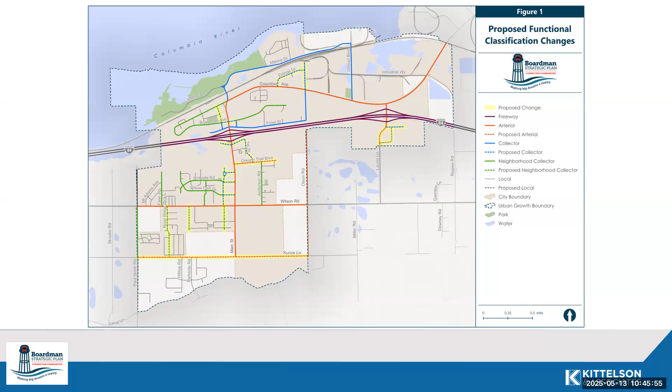Unstable. So you've kind of gone in and out. Sorry, what was that, Carla? Lost you and got you back. So I'm curious if the folks online. Yeah, actually, Matt's been steady on my end, Carla. Definitely our end. Okay. Yeah. Well, I'm not sure what you heard and didn't hear.

And so at the risk of repeating everything, I was just ending with: are there any comments on the proposed modifications for the arterials on the map here? System and kind of what the difference is between an arterial, a collector, and then a local road. I know there's some experts in the room because of where you work and what you do, but there's a couple of folks in here that this might be new to. So we're working on getting all the speeds designated, like balancing out the speeds and different types of uses that are going to be on each of those?

So classification is not specifically attached to uses. It's really about its function within the system. Okay. So if you think about the street you live on, let's say you live on Mount Hood or Mount Adams or Boardman Avenue. You live on a local street, and that local street will funnel into what's called a collector. And that's a street that's maybe internal to that neighborhood, but is a more defined, get you from north to south or east to west road.

And so if you live in River Ridge and you live on Eagle, you live on a local street. But when you get to River Ridge, you're now on what we're going to call in the future, I believe, a collector. And then as you get to Kunze or you get to Wilson, you get on an arterial. So it's a hierarchy that you get to.

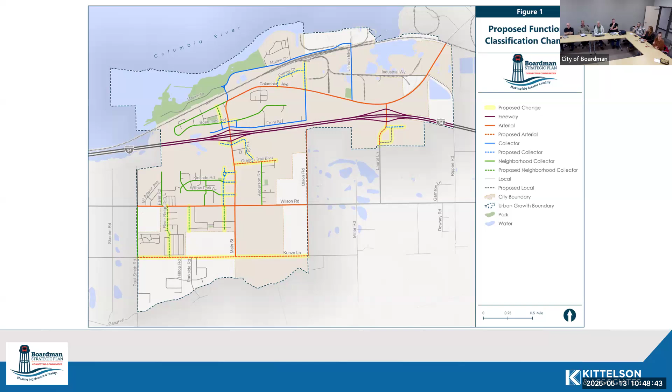I guess maybe what I'll say is regarding this map, is there anything that maybe people disagree with, without going through every single change here? But we do have upgrades to certain roads. Those are all highlighted in yellow. Anything with a dashed line would be a proposed modification to that classification. And what might be a little confusing is we don't have the future extensions of roads on this map, because that will come in a later version of this map. I just wanted to highlight what we are potentially proposing to change for what is already built today, not what would be built in the future. And that'll come here in a few slides.

So maybe just one final time, any potential conflicts or changes or disagreements with any of the changes we're proposing here? Okay, hearing none, let me just move on. Doesn't mean we couldn't come back to these, but for the sake of keeping us moving, I'll move on. The next slide here is what we're calling proposed federal functional classification changes.

So you might be asking yourself, why do we have a federal functional classification? Why do we have a local classification? Well, the local classification from the previous slide is what Boardman identifies for the roads in its city. Now, it doesn't necessarily mean it owns all of those roads, such as I-84, for example, that's owned and maintained by ODOT, but the city still classifies it as a freeway. And so that's the local functional classification, the previous slide.

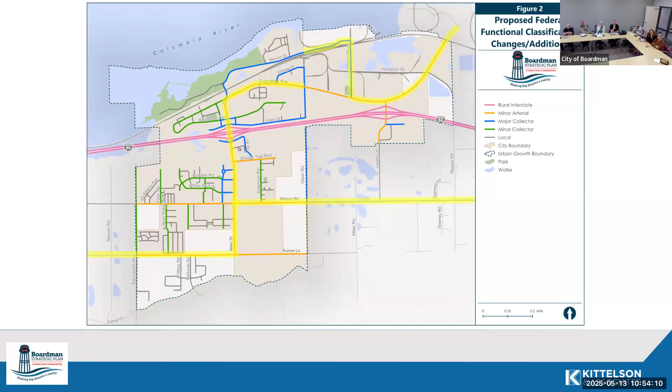So the step on this one, we'll include it in the TSP, but the long-term step is the city will work with ODOT's Region 5 planner and they'll start a process to get these roadways designated on the federal functional classification system. So on the non-state highway system.

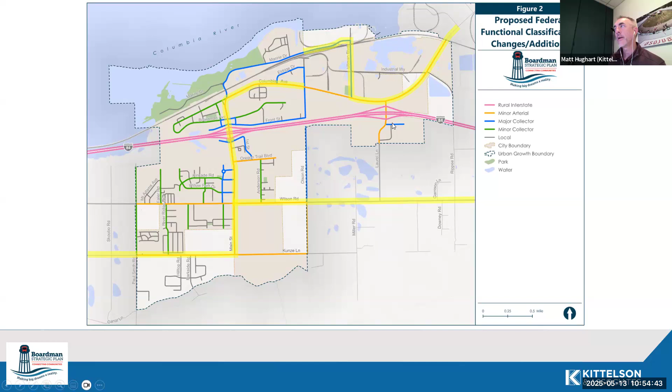Okay, moving on. Sticking with the context or the theme of classifications, one of the things the city does not have at the moment, it's kind of informally noted, is how do we deal with freight? So there's kind of two kinds of freight. There's industrial, long haul, regionally freight oriented trips where they're generated to and from industrial uses or manufacturing uses or commercial uses that have a lot of deliveries.

And then you've got sort of what we call local freight. And local freight could be as simple as your Amazon deliveries and other non-consistent, generally smaller freight that's serving commercial and or local uses. So we came up with this map to help the city designate what we're calling the regional freight routes and the local freight routes.

And I think this is sort of a nod to the Port of Morrow and its prominence in the city, part of the city anyways, to make sure that from a freight designation standpoint, we're clear on where we want freight to orient itself, certain types of freight related trips, and where we don't want freight to be using. So I guess the point here is, while the Main Street interchange is a viable route to some of these industrial uses in the Port of Morrow, I think the city would be looking to expect most of those freight oriented trips to continue to use the Laurel Lane interchange.

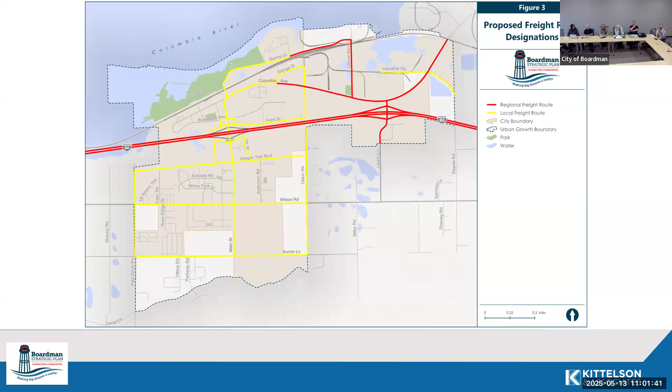Sure, and I can share those maps. Those have been maps for quite some time. Well, I think we had something previously that we incorporated those maps in. Yeah. I can forward those to you guys. There's separate routes, right? We've got a heavy route going west, a heavy route going east, and then also a long route going west and a long route going east. So there's dimensional issues as well as weight issues. Okay. Well, Jacob, why don't you resend us what you believe to be the most recent versions of that, just so that we can confirm we do have all of that information. What we could potentially do is mark up a version of this map, or as Carla suggested, maybe there's a 3B version of it that deals with those special scenarios, and make sure that's captured correctly. And then we'll share it back with you for confirmation that it's graphicked appropriately.

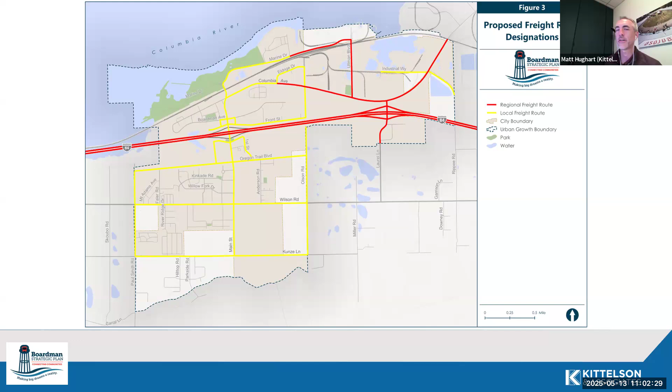Okay. Anything else? I fully expected that comment to come up, so I was prepared for that one, but anything else? Okay. Well, we're going to come back to this issue in a little bit as we get into the solutions projects.

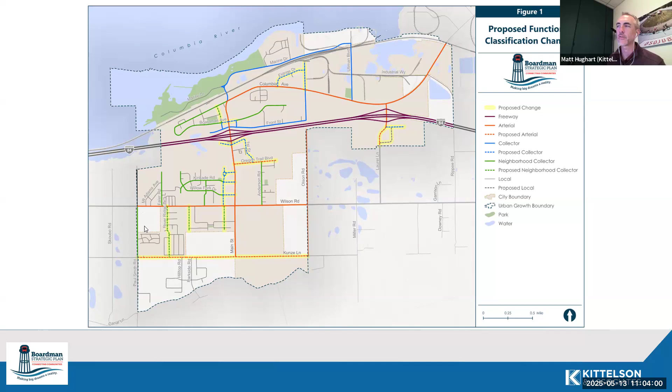Now, Paul Smith is an existing road, but it's not an upgraded road. So we've got a project as R9 to upgrade Paul Smith Road, right? Yep. To more of an urban standard according to the functional classification map that we had shared back over here, which would be showing it as a local road and or an upgraded neighborhood collector. So a lot of what you're seeing on here are upgrades to existing roads or identification of projects that would build new roads.

We're not seeing your aerial, Matt. Oh, sorry. We're not seeing your aerial. I don't know why. Oh, it's because I'm not sharing that particular screen. Anyway, I think we can visualize that one.

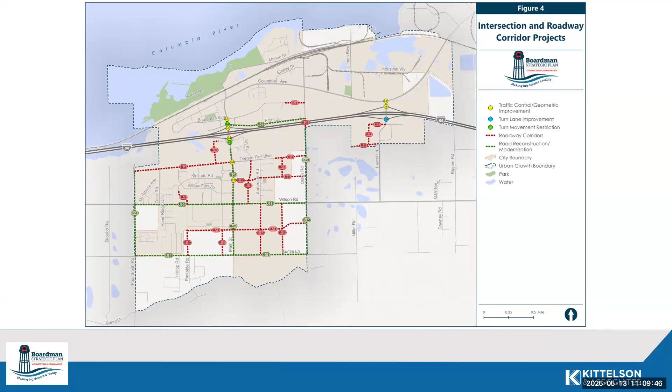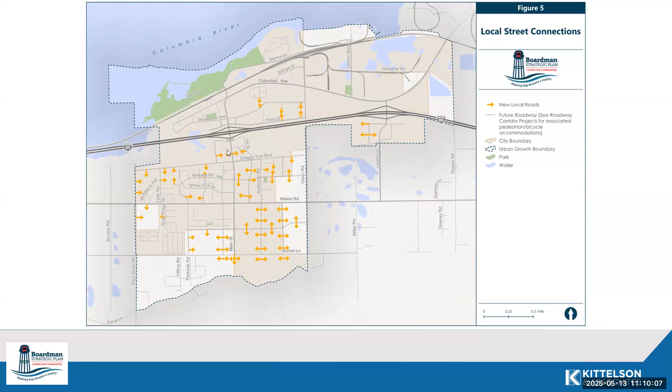Marlo, which figure are you referring to that you see it on a separate figure, but not on the one shown on the screen here? I see it on figure 5. Figure 5. Let me show that one real quick. Sorry, I'm going to zip past. Okay, so are you referring to what's going on right in here? Yes, because from an ODOT perspective, I was curious about that new road, and I didn't see a lot about it. Yeah, great comment. I don't know which graphic to focus on here. If I show some of my other ones, I'm gonna get us too far astray. But let me just show what this figure 5 is.

So figure 5 builds upon the collector and higher level roads that were shown. Back here, all these red and green lines, they're primarily focusing on your collectors and higher. They're not focusing on local streets. TSPs typically don't outline the specificity or the alignments or even the rough alignments of local streets. What they typically do, however, is show what we call assumed future connections. So figure 5, Marlo, is showing in orange where we would want to see local street connections occurring. So you pointed out what's going on here.

The interchange area management plan for the Main Street IAMP that was adopted back in 2009 envisions this backage road we're calling Southwest First Street. Southeast First Street was recently reconstructed, so now it connects Oregon Trail up to Front. This backage road will connect over here, but the IAMP does show a number of local streets backfilling and serving the redevelopment on both the east and west side. So these orange lines in here don't necessarily represent collectors. They just represent future local streets that could be developed to help support those uses.

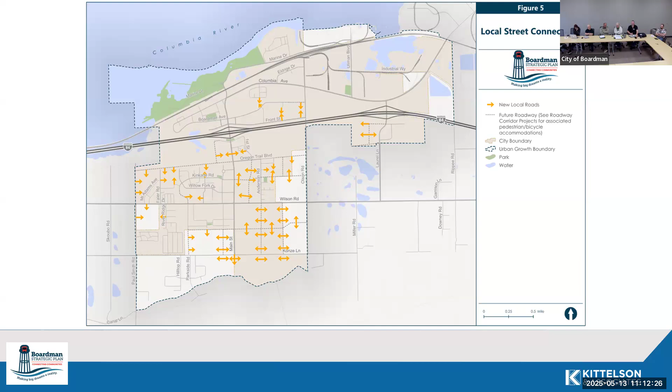Now, if you go deeper into the IAMP, those local streets are envisioned most likely to be limited access connections to Main Street. And so they're not likely to be full access right off of Main Street. So that's what these orange lines are representing. In particular, the ones just to the south of the interchange are a representation of what was in the IAMP adopted back in 2009. So, question, R6, is that what is currently Quail Lane going across there?

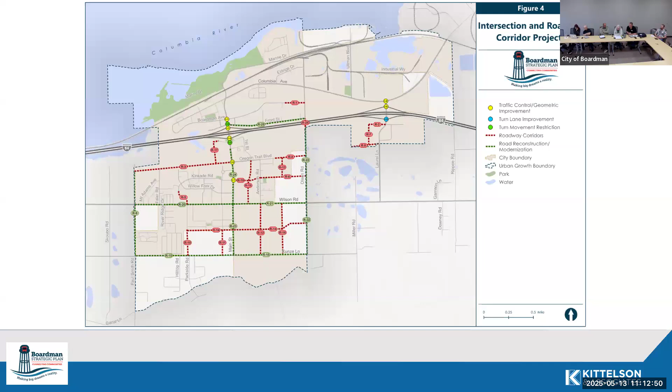R6? Give me a sense where R6 is here. Anderson Road to Wilson. Yeah. So R6 is really unknown. So R19 connects to R6. I don't know that in the end R19 and R6 will actually connect. That's a really big question. There is a vacant lot in that manufactured home project that we could potentially acquire for a street connection. We've been going back and forth internally as to whether or not we should. Again, I don't want you to think that R6 is on a map and that's where R6 will go.

But we are thinking about how do we take the Bailey Park subdivision that is in phase 1. They're going to come in with phase 2, 3, and 4, we think over the next little bit. How do we connect Bailey Park? It connects already to Anderson. Is there a way to connect Bailey Park to Wilson? I don't know. There's some vacant properties in there, and then you get into the UGB area. So the city is the beige and the white is the UGB. Again, as with both R4 and R6, when you get into the UGB, R4 has a pretty clear path.

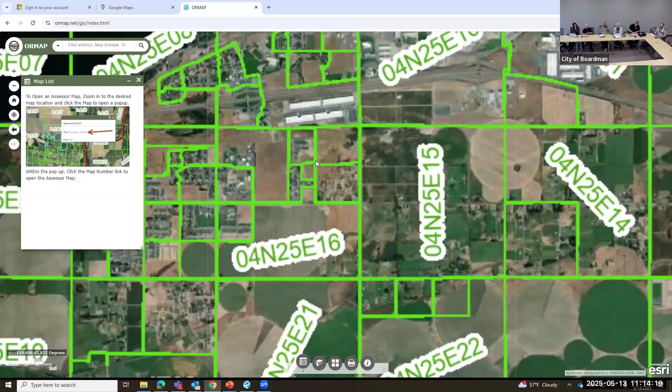R6 has a less clear path, but there is some property in there that is oddly shaped and appears to have a flag, or a pole to the flag, that a road could connect on. That's generally where it is. That's not specifically where it is. And so I just pulled up a map.

And just for my clarity, these designations 1, 2, 3 are just designators, not a timeline. Nope. It's a random number. I don't think it's a timeline. R23, R24, and R25 are programmed. I didn't see them. Yeah, the numbers, Marlo, the numbers on the map don't mean anything. It's just the order in which we had created them. We can reshuffle the numbering if you want. So don't worry about the numbering. It doesn't have any bearing on temporal issues, nothing to do.

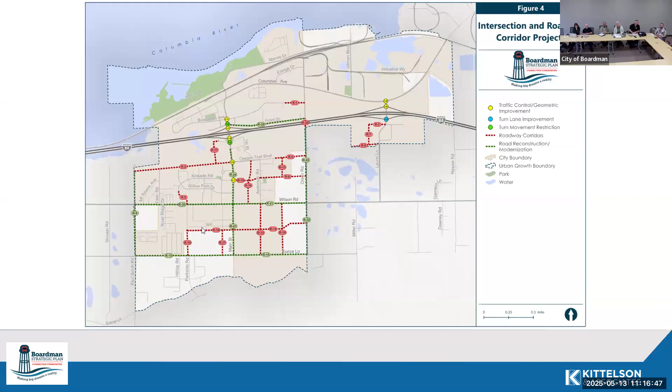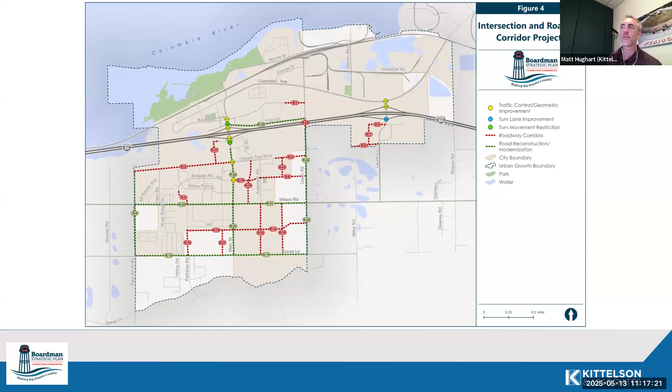Okay, so any questions or challenges on any of these alignments, please share those back to us. We don't pretend to nail this the first time. And there might be some tweaks to these roadways, but again, they're just lines on the map. However, we want to spend the rest of the presentation talking about our best and most challenging area, which is Main Street, and particularly the Main Street I-84 interchange area. You'll see on this map there's a lot of intersections popping up. And to be quite honest, there's some challenges that we are struggling with a little bit. And I think the city is going to have to face some harsh realities.

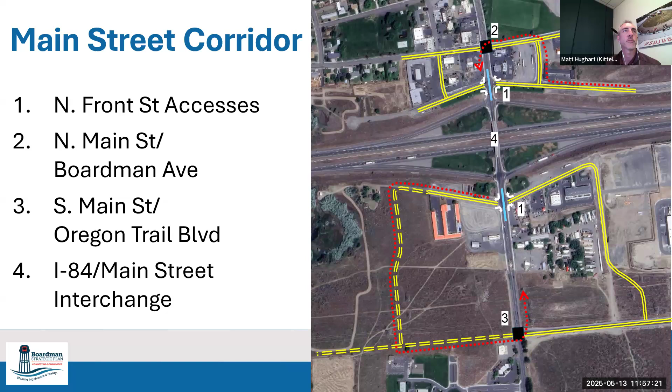It's also got another pretty significant limitation in that its vertical clearance on I-84 is not to desirable standards or dimensions. Any high load coming east-west on I-84 has to actually exit the freeway on these ramps, cross over the intersection and then back down in order to get east-west through here. So it is a limited overpass for those two really important reasons.

One of the things that we've found is when you look at the capacity of these freeway ramp terminals themselves, and ignore the details on this image, I know you're going to want to look at it, we're projecting a lot of traffic growth through this interchange for reasons previously stated. There are single-lane ramps at the interchange terminals. There are no north and southbound left turn lanes.

And as you probably already know and have experienced during certain times of the day, you wait quite a bit coming off the freeway to make an east or westbound left turn to go south, particularly during peak school times, and you've got some traffic backup and queuing occurring on these ramps.

So one of the big findings is if we can't find an alternative to mitigate the Main Street demand, and we don't think we've got one, even with Olson as an option, there's still going to be a lot of north-south traffic on Main Street. That's going to limit the capacity of these ramp terminals.

And one of the things we found is that roundabouts at these ramp terminals don't have enough capacity. There's only so much capacity you can squeeze into a roundabout, and with the demand that we're projecting in the long term, a roundabout just isn't going to cut it.

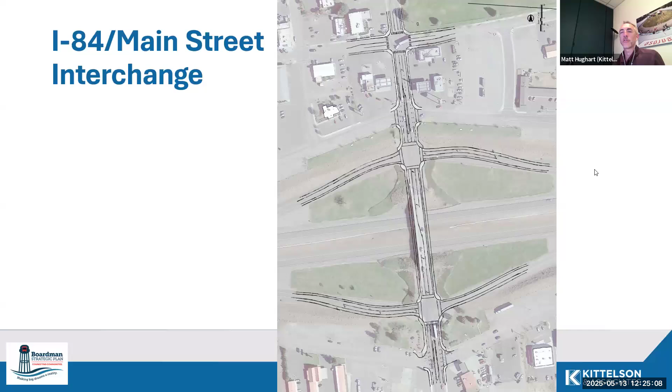Let me move on. There's a couple of other figures in here we're not going to have time to really dive into, but we've got a pedestrian projects figure. So all of these projects represent improvements that the city should consider on its existing network, as well as projects that would help to tie the city together more from a pedestrian standpoint. So there's any number of projects on here. Some of these are roadway upgrades. Some of these are new facilities and new crossings. Sorry, Carla, were you trying to say something?

Yeah, I was just gonna say, Matt, that this gets augmented, I think, by what's happening with our Parks Master Plan as well, because it's also really talking about connectivity, whether it be trails or sidewalks. So yeah, this figure kind of gets married with what we're dealing with in the Parks Master Plan also.

Exactly. And I will point out a nuance on here: even though we've got roadways like Oregon Trail Boulevard being extended, we didn't include a pedestrian project on that simply because we know when that gets built, it's not going to get built without pedestrian accommodation. So anything that you see on this map is an upgrade to an existing corridor where a sidewalk doesn't exist today. That's an important distinction: why aren't we showing projects on some of these new roads? Because they're going to get built with those, and that's what your standards say. So we didn't separate those projects out.

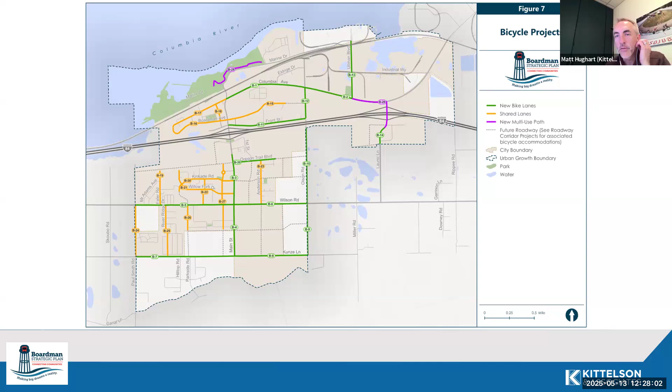I didn't see the project for Marine Drive and Main. I'm sorry, repeat the location again. Main Street and Marine Drive. Oh, Main Street and Marine. Are we talking about up here? Yeah, at the Y. So there was a ped project that would add a sidewalk to the bridge going over the railroad and kind of connecting it down. And I think what we're recognizing is that the intersection and the geometry is so kind of funky and odd that maybe it would be better to route pedestrians around it.

So that's the P2, is bringing a sidewalk over the overpass and connecting it down to Marine Drive on the west side, and then connecting it back to sort of that existing multi-use pathway that exists on the north side of Marine Drive. So that was our solution there. It's not really detailed in these maps, but that's something that we had thought of that might make some sense there, given the geometry and the oddity of that intersection.

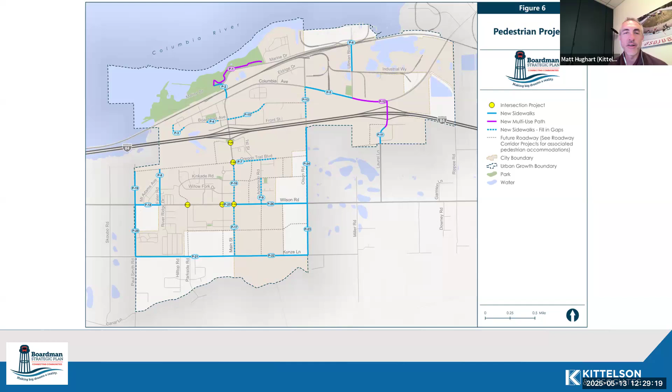So whether or not you agree with that, I would certainly be willing to discuss that further. But that was what we had come up with to better accommodate that scenario. And certainly be willing to take your comments offline if you want to discuss it further.

Yep. So I just want to encourage everybody, the draft documents are posted on the website and at the conclusion of this meeting, either Matt or Isa are going to send me the PowerPoint slides and we'll post those. And then once the meeting summary is done, we'll post the meeting summary. We'll also post the video there. The attachments document is 145 pages. And if you're really a geek, you'll love it because it gets into all kinds of tables and graphs.

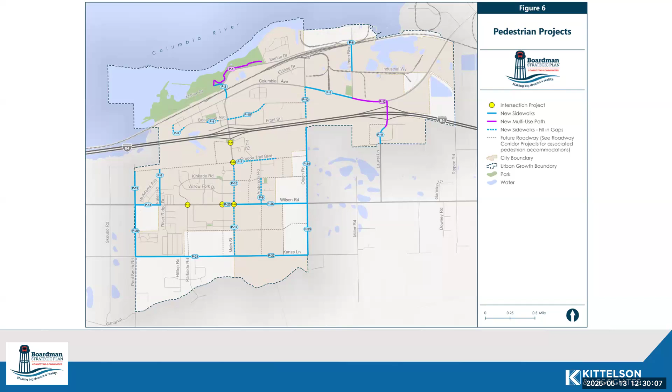But the shorter introductory document, just kind of the document itself, is only about 37 pages. A number of those are kind of white because the figure goes in. You can print the figures as well. It's a separate document on there. So if you want to get into that and read through it, please do. Again, Matt will send a refinement to that, I'm hoping before our June 3rd work session with the Planning Commission and City Council.

That work session will start at 5:30 on June 3rd. I think it's June 3rd. It's whatever that first Tuesday is. And then if you have any questions about all the other projects we're doing, I'm happy to answer those. But again, you can find all of the projects on the city's website. If you go to community and go to the strategic planning page, they're all there.